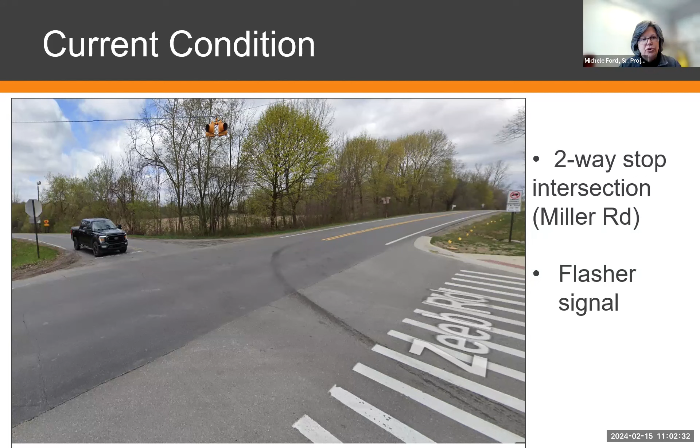So our current condition out there is it's a two-way stop. There is a flasher that is flashing red for the Miller Road people. They're supposed to stop. And then we have free flow on Zeeb Road, but the yellow flasher is a caution for them to know that there could be traffic entering from Miller Road.

So why are we working on this particular intersection? Well, we do have a history of crashes there, and we have a history of fairly serious crashes. So we always keep an eye on our entire road network, but especially on our intersections. And in addition, MDOT also flagged this intersection in a local safety initiative that they did in 2018. And it seems like a long time ago. However, it takes a long time for us to plan our projects.

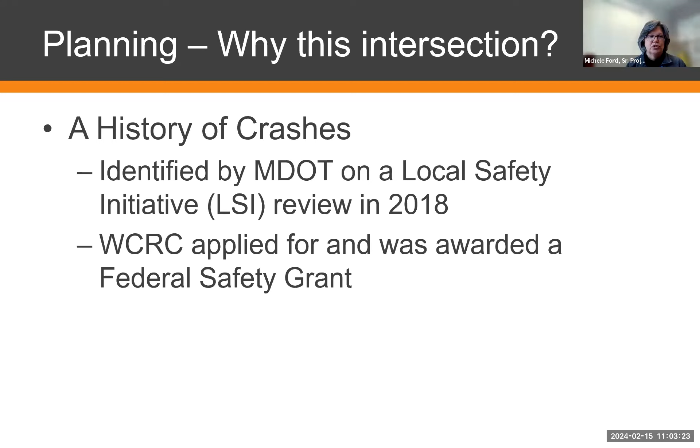We understood that this was an issue, so we went ahead and we applied for a federal safety grant. Typically, you apply for a grant for several years in the future, which is what we did, and we were awarded a grant to do some improvements to the intersection for safety. So we decided on a roundabout. So I have here some general information about roundabouts as to why we chose this.

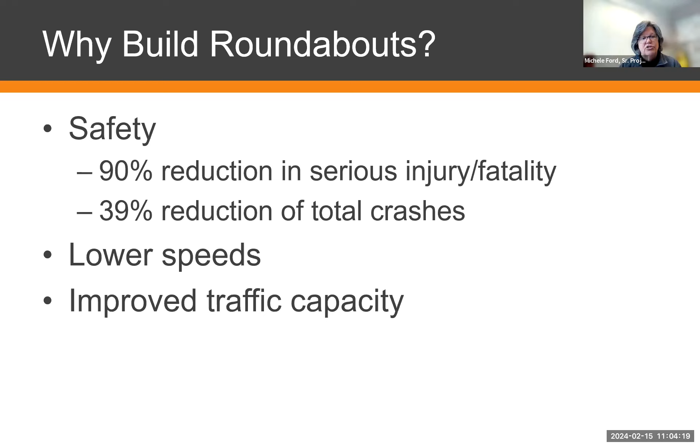It's one of our go-tos for safety if we have an intersection with a lot of crashes, because statistically, they do show quite a large reduction in serious injury and fatalities. And they also typically have a reduction in total crashes. Part of that is due to lower speeds, because we design them so that you will lower your speed as you're entering the roundabout. And kind of a bonus is we actually can improve traffic capacity. People on those side roads like Miller Road may have an easier time entering the intersection.

So the way the roundabout works is we're decreasing points of conflict. So on the left, a standard intersection has 32 points of conflict. The ones in the lightish blue color that say crossing, those are the ones that have the greatest potential for serious injury and fatal crashes. We want to decrease those as much as possible. So we go over to a roundabout where you see it doesn't have any of those crossing conflict points. It only has 8 points, and they're all diverging or merging points, which, once again, in general tend to lead to less severe crashes.

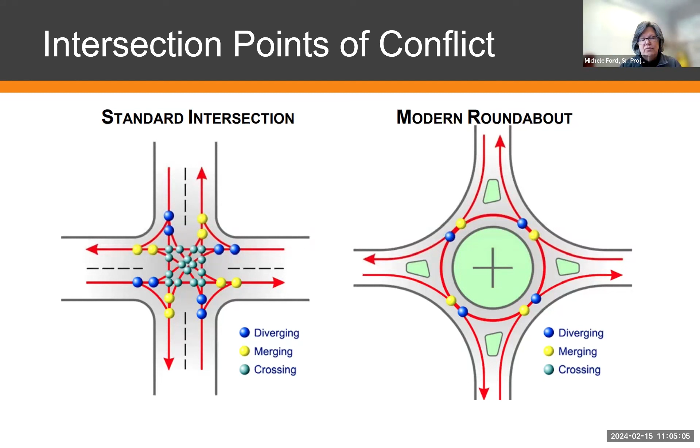So here's an aerial of one of our roundabouts that we completed in the last several years. The way a roundabout works, hopefully you guys are getting used to them, as we have constructed many in Washtenaw County: the entering traffic yields to the traffic that's already within the roundabout. There's a counterclockwise movement, and we put in both splitter islands and that central island to help control the speed of the cars.

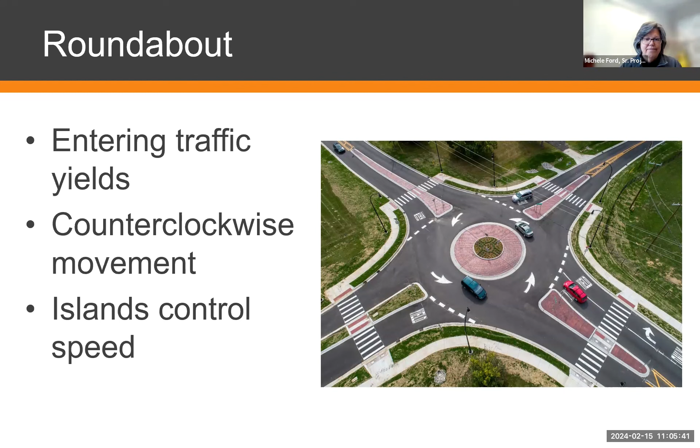As I mentioned, we have been installing quite a few of these roundabouts within Washtenaw County. We have the bonus of safety, that traffic capacity. It's less signals for us to have to maintain. All of that leads to it being a very popular form for us.

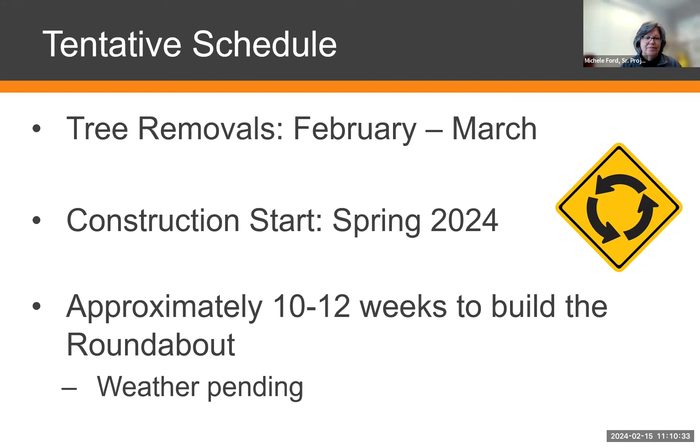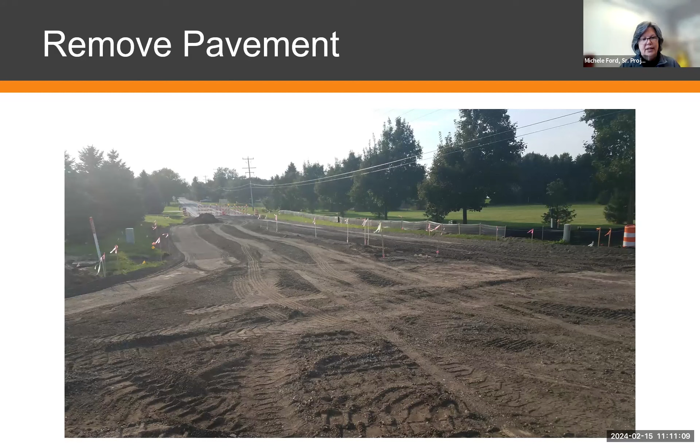Next. So I have some slides here just to kind of show you what's involved with the construction for the roundabout. The first thing we have to do is completely remove all of the pavement that is currently out there. For this particular project, we'll be going north, south, and east a small way. And then on the west side, we'll be going almost all the way over to Dexter Ann Arbor Road. So we don't leave an orphan piece of pavement between Dexter Ann Arbor and Miller and Zeeb Road.

So next one, then we have to build up the new road bed. This will involve us bringing in some extra limestone. We use a 21AA limestone, it's called, and it's an aggregate, a fairly dense aggregate that works really well as a road bed. This is also the time that the contractor will install some underground storm sewer.

We have a small amount of underground storm sewer on this, not a lot, but this would be the time that they would do it, between taking out the pavement and putting in the new road bed. And they put that down and they make sure our grades are all good and then compact it to a specified amount.

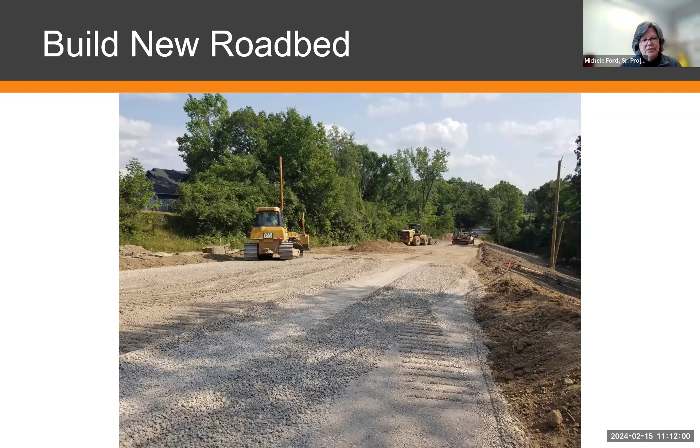Then our typical thing is we do the curbs next, and they have to put out forms. We do have concrete curbs on this. For our roundabouts in Washtenaw County, we have a special detail for our curbs. It's a little bit different that helps work with the roundabout traffic flow. And so the contractor has to get the forms all set up.

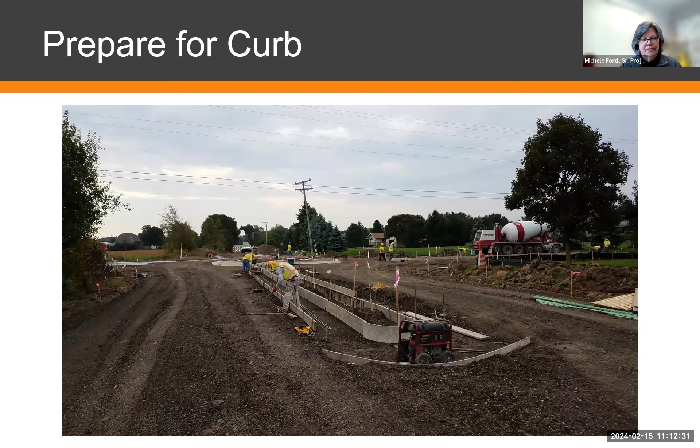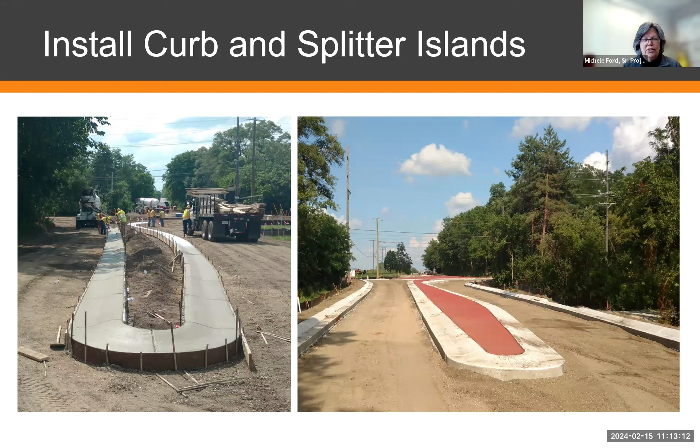We call that the splitter island. And we do make that in a different color. It's just a visual recognition for the motorists so that they can see the curbs of the roundabout a little bit better. And we have to let that cure for a while. We also put in the central island. This roundabout has a solid central island like that. It means that there's not like a vegetative center.

Sometimes the township or the road commission will elect to put something in the center for some visual enhancement. Because of maintenance and everything, it really does work well for us to do the large central island. It's also in red, as you see. And on this one, we like to put in a decorative concrete. This was one of our other projects.

I think it was out on Textile and Woodland, and it was right after the decorative concrete had been stamped. We use an actual stamp for that, and it's a little bit dirty, and that has to do with the material that they put on to help them be able to remove the stamping, and then it'll all get cleaned off and sealed, and it'll look really nice.

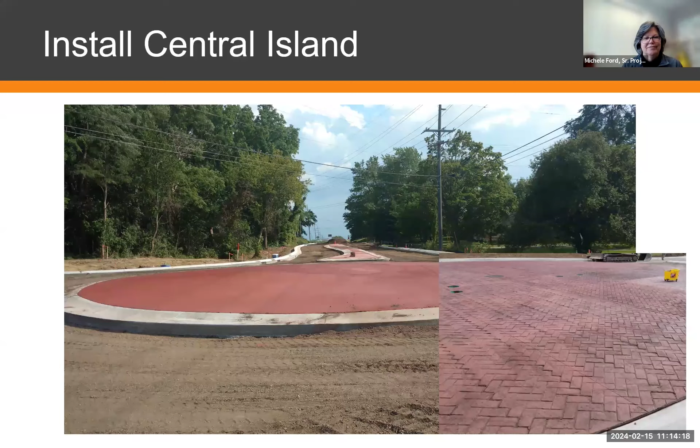Next. So then it comes time for paving. This particular roundabout has 6 inches of asphalt paving scheduled. So we'll do that in 3 different lifts. So it does take a while for them to do it. Roundabouts can be a little bit tricky to pave. And so it does take us a little while to do it, longer than if you just went down a straight road and they could just pull the paver quite easily. So we have to do 3 courses.

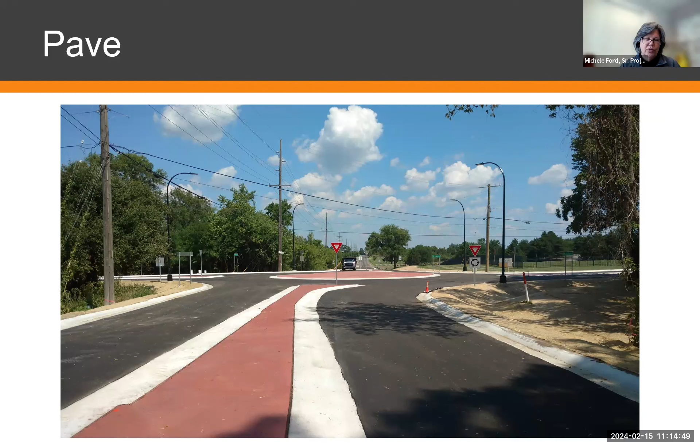And then next we will, Emma, install our pavement markings. So this is when they were putting up yield on this particular roundabout. I think this also was our Textile and Woodland. And so there's a whole bunch of different pavement markings that have to go in, and we need to get those completed before we can open up the road.

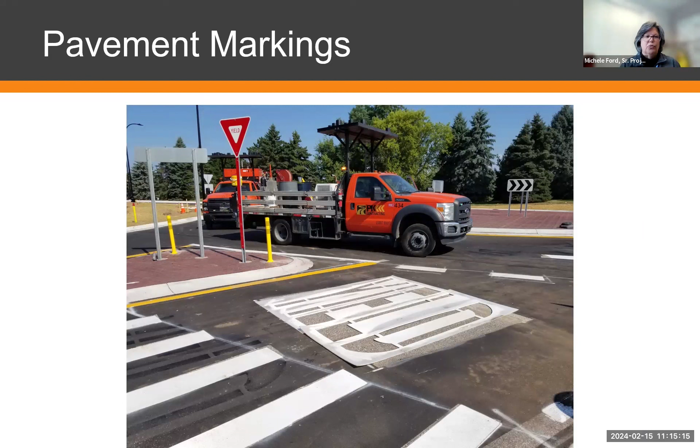And then we have signs to go in. There'll be the yield signs. There'll be some signs within the center island to help alert drivers that they do need to make that right to go around.

And this particular roundabout also does have a pedestrian crossing. There is an existing pathway along the east side of Zeeb Road that was put in by Scio Township a few years ago. So we do have to realign that slightly right at the intersection. So we'll be realigning that and putting a crosswalk in.

It will have a pedestrian refuge in that splitter island. So the pedestrian will be able to only have to look in one direction for oncoming traffic. And so they can get out in the middle and then wait there for it to be clear and go on through the rest. So we will be, like I said, realigning that pathway.

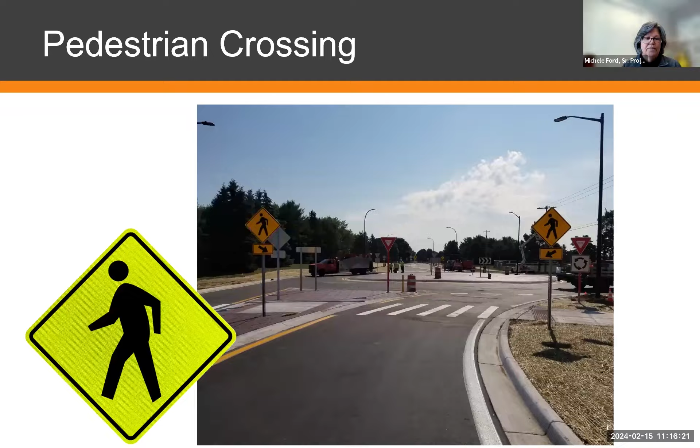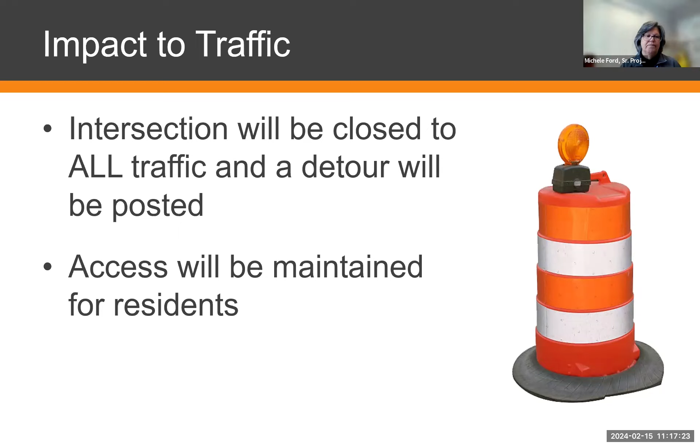So, our impact to traffic. Unfortunately, with these roundabouts, the most efficient and the safest way for them to be done is to completely close the intersection to traffic. So it'll be fully closed for that 10 to 12 weeks, and a detour will be posted. We will be able to maintain access for any residents who happen to be within the closure.

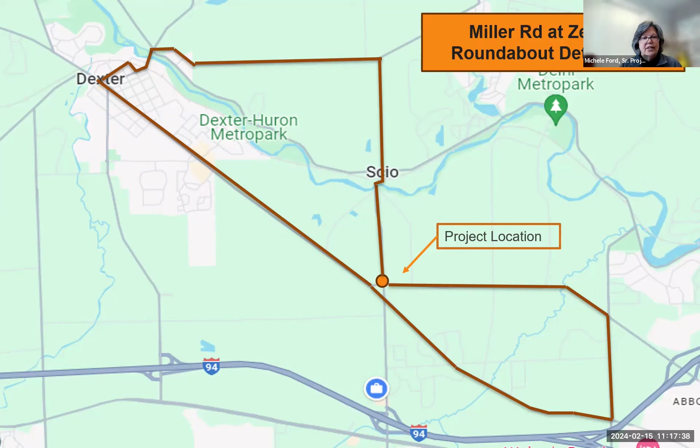So we'll be posting a detour. We're going to have a couple different legs on this detour. You see here, our project location is kind of in the middle there with that orange dot. And I've got a little bit more detail on each one. So for the Miller Road, our posted detour will be Dexter-Ann Arbor Road to Wagner Road to Miller Road, or in the opposite direction.

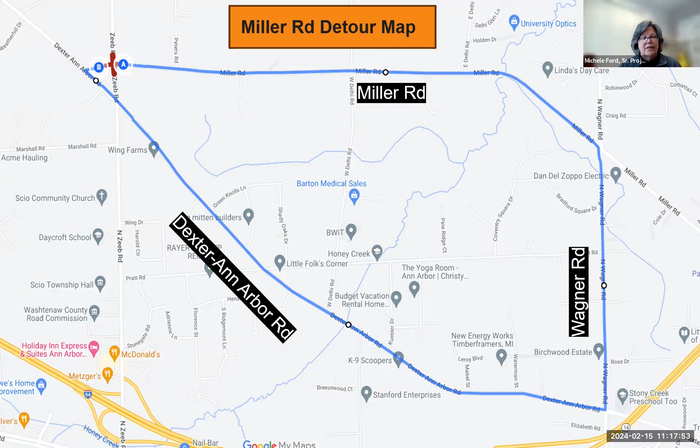And then on the northern leg, Dexter-Ann Arbor through some roads within the city of Dexter, Broad Street, 3rd, Central, then go to Joy Road and Zeeb Road. We did obtain a permit from the city of Dexter. They have reviewed our detour plan and have agreed to it and issued us a permit to put all those signs there. So they're aware of this coming construction.

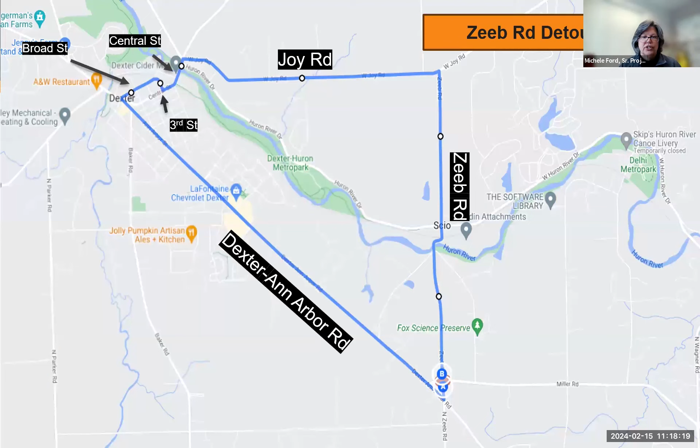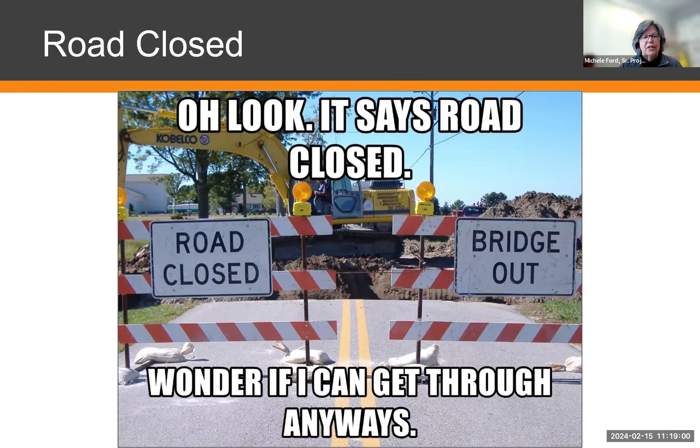And we always like to throw these up. Road closed means road closed. We have, especially in the last few years, struggled with people obeying our road closed signs. That can cause a lot of issues. It can cause safety issues for you, for the construction. We've also seen damage to vehicles because there are unexpected drop-offs, there are things going on. If it says closed, it means closed. So we would really be appreciative of everyone obeying those closures.

So if you have any other questions on this, we'll do our question and answer in a minute, but we also have a project page at wcroads.org. Emma's going to show you how to do that in just a second. And you can subscribe to receive project updates.

And then also here, you notice that my name is not on this slide. I have been the project manager on this throughout design, but Kevin is going to take it over for us for construction. So if you have any questions concerning the upcoming construction, Kevin's information is here, and we'll show it to you again at the end. Emma? Thank you so much, Michele.

So now I'm going to show you how to get to the project webpage. Someone yell at me if you can't see my screen. So here I've just opened a regular tab on Google. I've typed in our web address, which is wcroads.org. This will take you to the home page. There's going to be a menu bar at the top of the screen. One of the options is going to be roadwork and construction, and a drop-down menu is going to pop up. You're going to click on current projects.

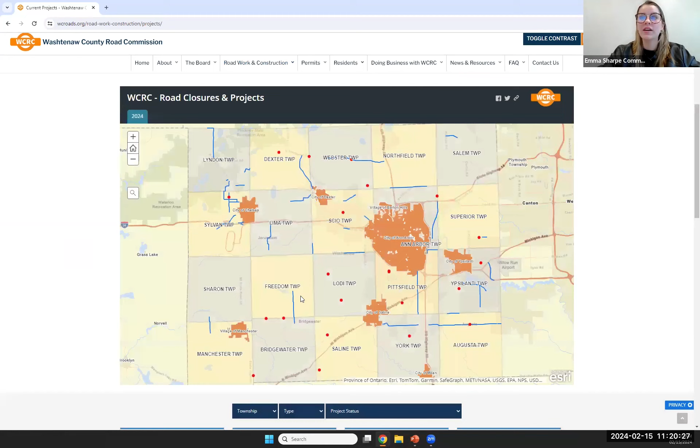Here you'll be able to see an interactive map of every project that we have going on throughout our county. You can click on different projects and see more information. If you scroll further down, you'll be able to see the tiles that we have for each of our projects. They're in alphabetical order, but you can use these bars at the top to organize them any way you want. So you want to go and find the Miller Road and Zeeb Road roundabout.

Here you'll see a map of where the project location is, the township, when the work is being done, impacted traffic, funding information. You'll be able to see any project updates posted in the latest update section. You'll be able to find the project manager's contact information here in the corner, and then any helpful links, like the detours or the recording of this meeting.

And then the most important button is this orange subscribe to project updates. If you click on that, you're able to sign up for project updates for whatever township, whatever kind of project, and whatever kind of update that you want to receive from us.

Okay. Now we will open the presentation up for your questions. If you are viewing the meeting on your computer, first make sure to click on Join Audio. You can raise your hand by clicking the Participants or the Reactions button at the bottom of your screen, and then the Raise Hand button at the bottom right of your screen. If you dialed into the meeting from your touch-tone phone, you can raise your hand by dialing *9.

As the meeting host, I will unmute participants with raised hands one at a time. I will announce your username or the last 4 digits of your phone number when it's your turn to speak. We are happy to answer as many questions as possible, but please be respectful of each other's time. If your question is answered before you're called on, you can lower your hand by clicking the lower hand button or by dialing *9. Okay, I do see that we have a few hands raised, so I will go with the person named MF. I will ask you to unmute yourself.

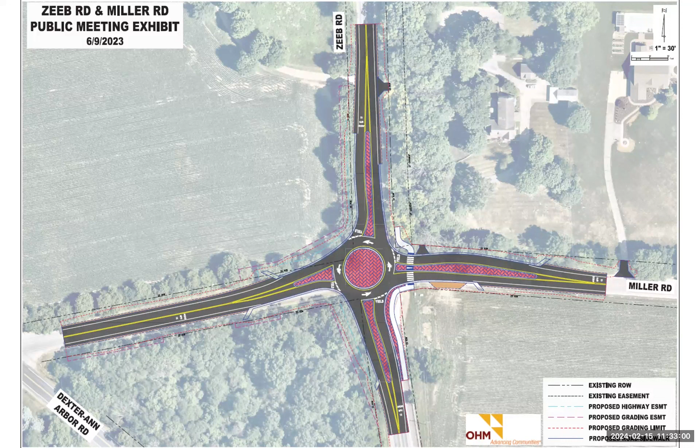And you talked about the cost of this and how you were funding it. Is there any funding going to be coming from local sources? You listed state and federal. So is any of the cost going to the township or the residents? No, there will be no cost from the township or the residents.

We have our Michigan Transportation Fund, which is considered our local funds. Those are generated from the license and user fees and the gas tax. But there's no contribution from the township or the residents for this outside of those fees that you already pay in your gas taxes. Thank you.

Okay, we got one more question in the chat. MF asked, the Dexter Ann Arbor intersection with Miller and Zeeb is so close to the roundabout. How will this impact the potential backup after folks drive around the roundabout and towards the other intersection? Well, when we did our analysis on this, we don't think it's going to be any worse than it is now.

It is a close proximity. The traffic signal will clear with each cycle. If there are backups, it would be for a very short period of time within the day. It's not going to be a regular occurrence. And even with the roundabout, it would probably be easier to enter than it is now making a turn from Miller Road.